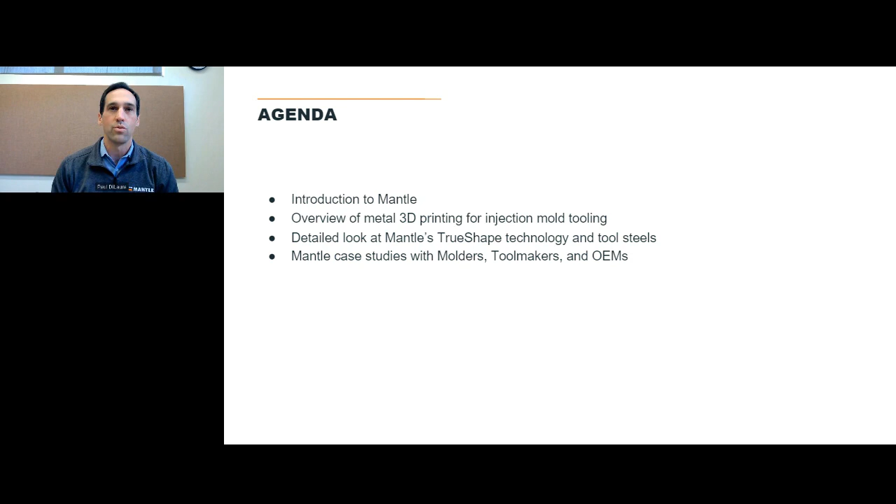So a bit about Mantle. Mantle is a technology development company. We've developed a metal 3D printer, we've developed software, and we've developed tool steel materials that we sell to molders and OEMs and tool makers to really automate the toolmaking process and reduce the time and cost associated with what is today a very lengthy and time-consuming process. And we're able to do that by producing tool steel components that meet the accuracy requirements, surface finish requirements, and material property requirements of many types of tooling. So we'll go into a lot more detail on that.

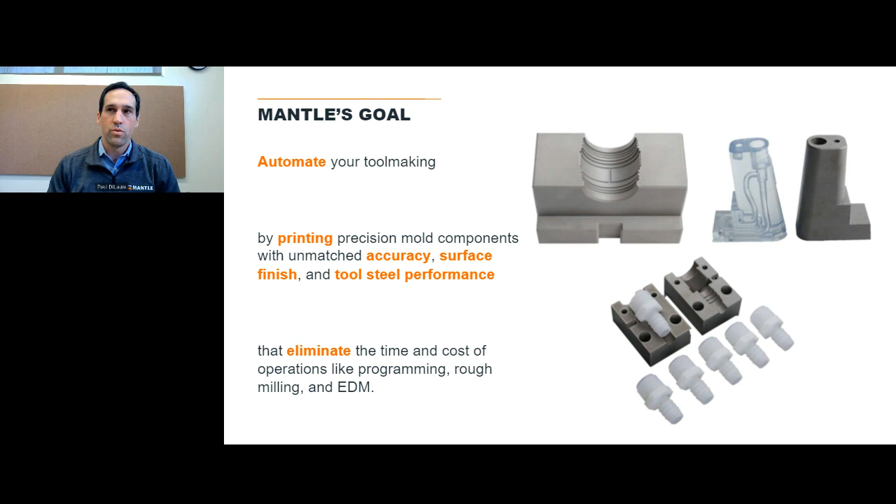But before we do that, let's talk a little bit about the landscape and how Mantle fits into the landscape of metal 3D printing, because we're not the first company that's developed a metal 3D printing technology. And we're not even the first company that's been used for tooling, including injection mold tooling, which is the primary application that our technology has been used for. But we are doing it in a different way, and we'll talk about that.

But first, let's talk a little bit about the challenges associated with tool making and why 3D printing can be relevant for it. I think, as probably most of you are aware, the process of making a tool, making an injection mold tool or extrusion die or a tool like that, is a very time-consuming process. It can take weeks to months. It's very expensive. It can take a lot of very skilled labor, which is hard to find, increasingly hard to find, and increasingly hard to develop. And then, as we've all experienced over the last several years, challenges associated with supply chains and tariffs have made it even more challenging to develop tooling overseas and then import it here, which is a common practice, but one that has been a bit more risky lately.

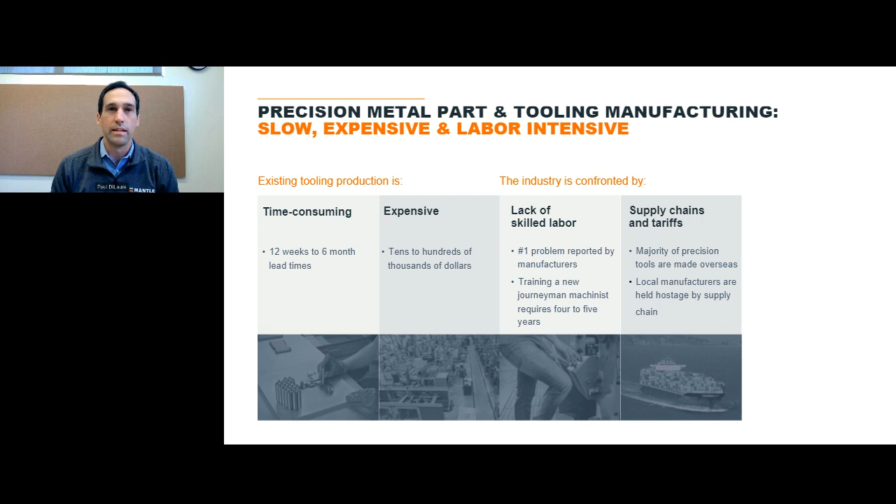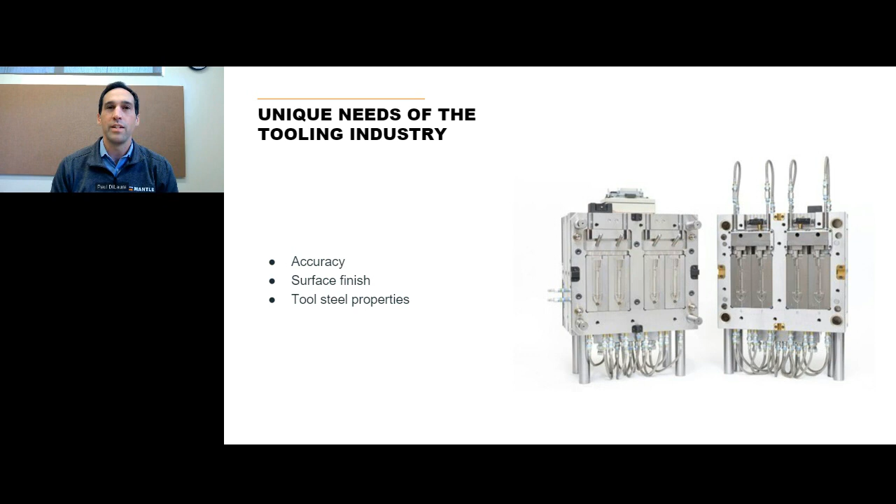The requirements to make an injection mold tool are really amazing. An injection mold tool is an amazing feat of engineering and manufacturing in terms of the accuracy, the surface finish, and the ability to produce millions of parts consistently over time. Really an amazing feat to create an injection mold tool.

But in order to do it, it takes a lot of steps and a lot of resources. Typically you're dealing with not only a quoting process, but sourcing raw materials, creating the rough part, and then a variety of steps in order to create the precision finish required for an injection mold tool. It's typically multiple machining operations, multiple EDM operations. Each of those operations requires machine time, programming, handoffs, and scheduling, and all of that contributes to the long lead time associated with tooling and the high costs associated with that.

So there's an opportunity, if there's an opportunity to automate this, if there's an opportunity to eliminate some of these steps, that can be of great value.

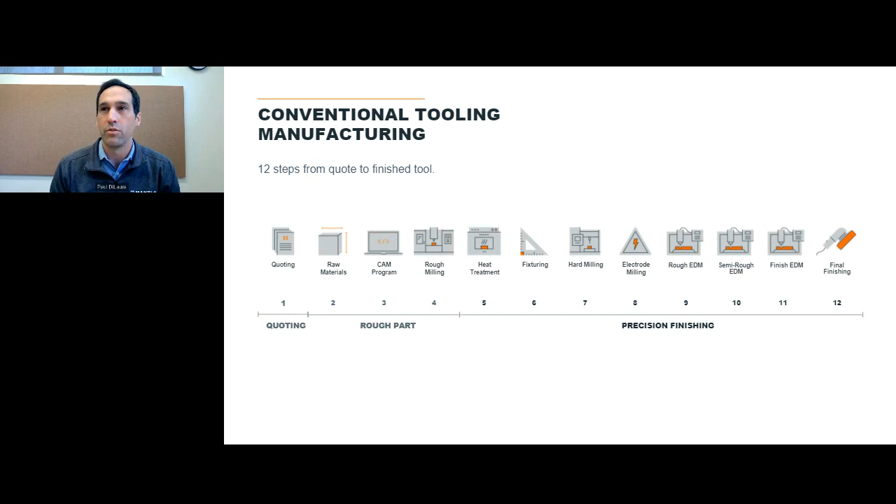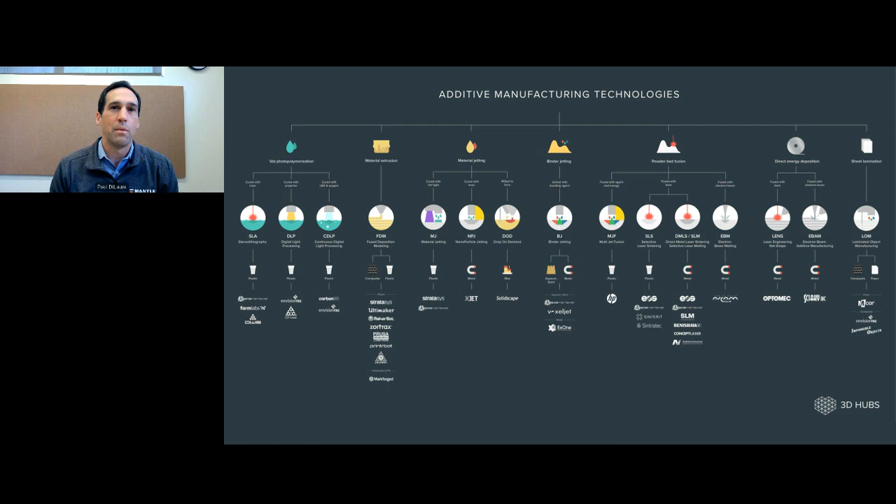Now, as I mentioned, Mantle is not the first metal 3D printing technology on the market. There's a whole host of technologies out there. This slide shows over 15 categories of printing technologies, hundreds of different companies in this market that have pursued this market. But I'm really going to focus on 4 of them that are relevant for tooling, or have been used in some cases for tooling.

The first of these is powder bed fusion, sometimes referred to as direct metal laser sintering. This is perhaps the most commonly used for injection mold tooling. It's essentially a bed of loose metal powders that a laser beam goes over and etches or welds together. Then the powder is reapplied, the bed lowers, and that continues on and on again until layers are built up and a 3-dimensional tool is formed.

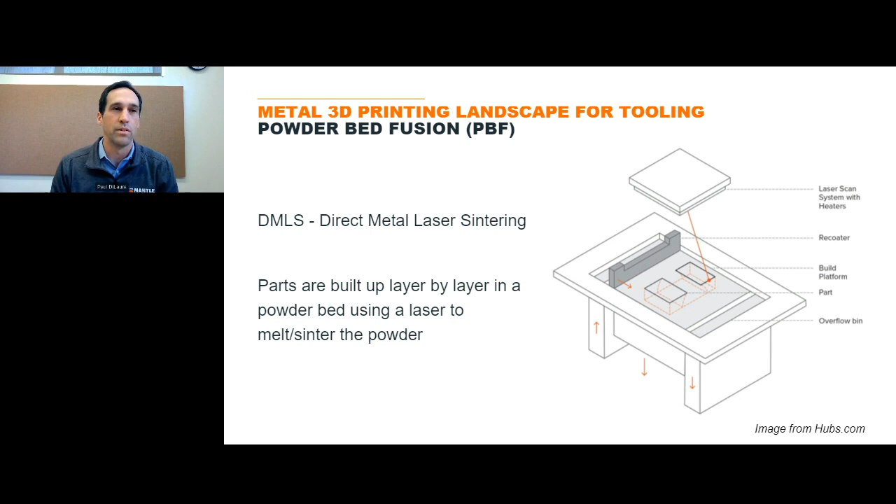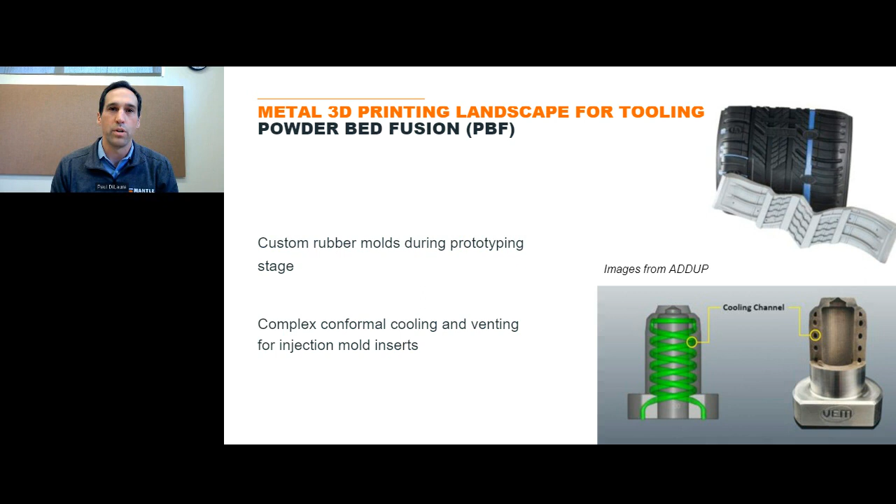It's a great technology, and it's been used very successfully for types of tooling like custom rubber molds during the prototyping phase, and also for injection mold tooling, specifically when things like conformal cooling are relevant, when there's a desire to create very unique geometries that can be 3D printed but can't be made conventionally very easily or at all. Similarly for things like venting and creating porous structures to improve venting in a molding process. So all those are great applications associated with this technology. There's also the opportunity to build on top of existing tools, to repair or build on top of them - a great advantage of this technology.

Unfortunately, some of the disadvantages are that the parts themselves that come out of the DMLS process are fairly rough and generally do not meet the precision standards of tooling. Therefore, a lot of post-processing is required to meet those requirements. Similarly, the parts have residual stress built into them because of the laser process, essentially a welding process. So secondary operations like machining or EDM cause the steel to warp, bend, or move, making those operations more challenging. Also, you're dealing with loose metal powders, and not every shop is set up to deal with that.

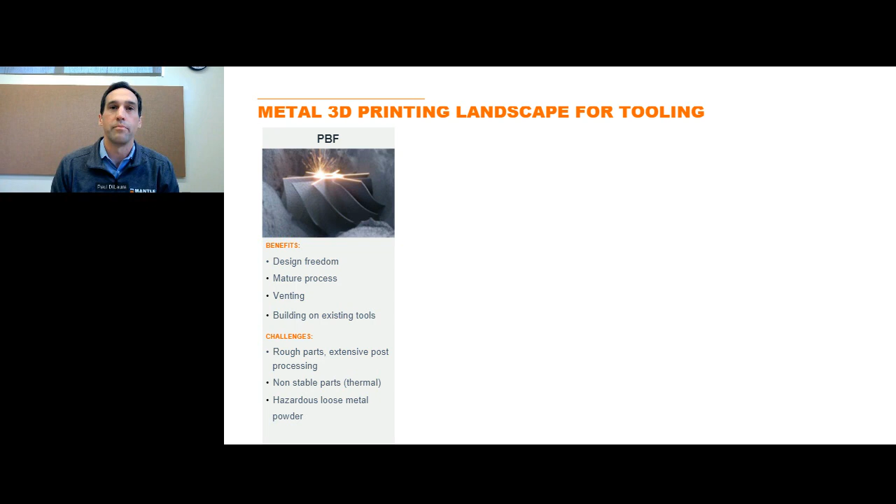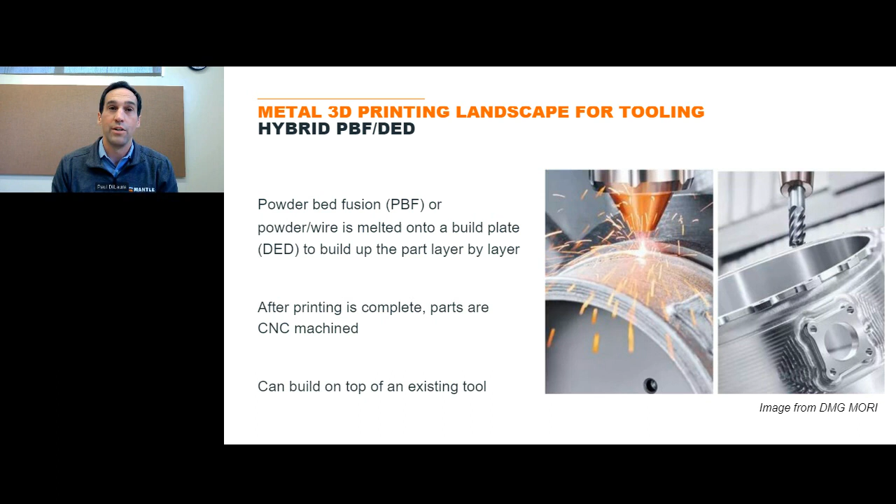Now, kind of an advancement on that technology is to turn it into a hybrid process that includes not just direct metal laser sintering, but also machining in order to clean up the surfaces and improve the surface finish and accuracy. That can be done on top of powder bed fusion or on top of another similar technology where you're extruding a bead of powder or wire that's melted onto a build plate. In this case, it's a hybrid process - you're machining, and you can build on top of an existing tool to get very good accuracy, while getting the design freedom that comes from 3D printing.

But again, the challenges are you have a part that has a lot of residual stress in it. The tool itself has a lot of residual stress, and it can be very challenging to do those secondary operations because of warping and bending. Also, these systems tend to be very, very expensive and really haven't been adopted very widely as a result of that.

A third category is a material extrusion process, often called MIM extrusion, where you have some form of media, a filament or a rod made of metal powder with a binder and a wax that encapsulates it. That is then 3D printed, extruded.

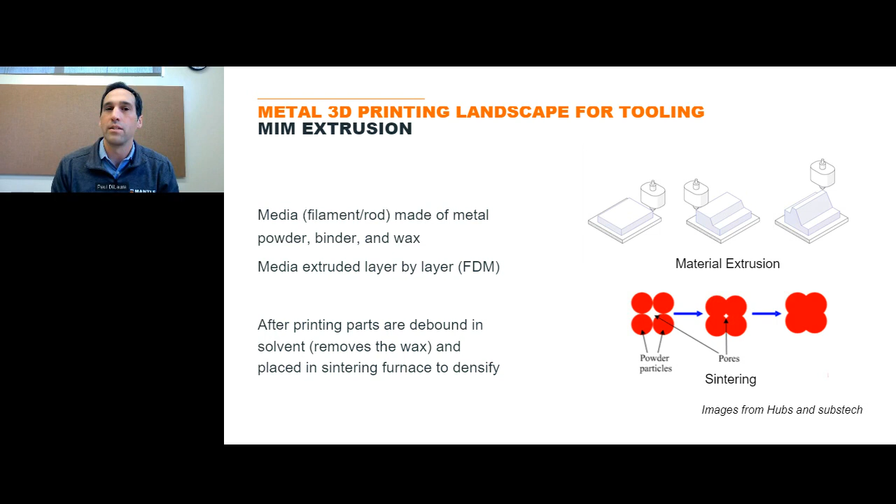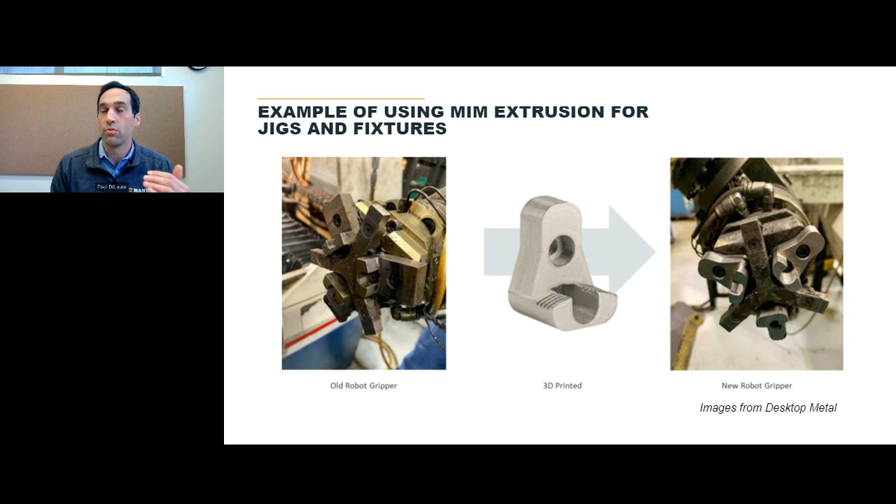Later there's a debinding step and a sintering step to turn that into metal. This has been used very successfully for things like jigs, fixtures, and different types of tooling that generally don't have the same precision or accuracy requirements as injection mold tooling. It's also generally a low-cost solution, low maintenance, easy to use. But the parts themselves are fairly rough and don't meet the surface finish or accuracy requirements of tooling, so a lot of post-processing is required.

Similarly, the parts themselves are not very dense, and you're not able to create thick cross sections. You get a lot of shrink, and you're not able to control the accuracy very well. And finally, there's binder jetting.

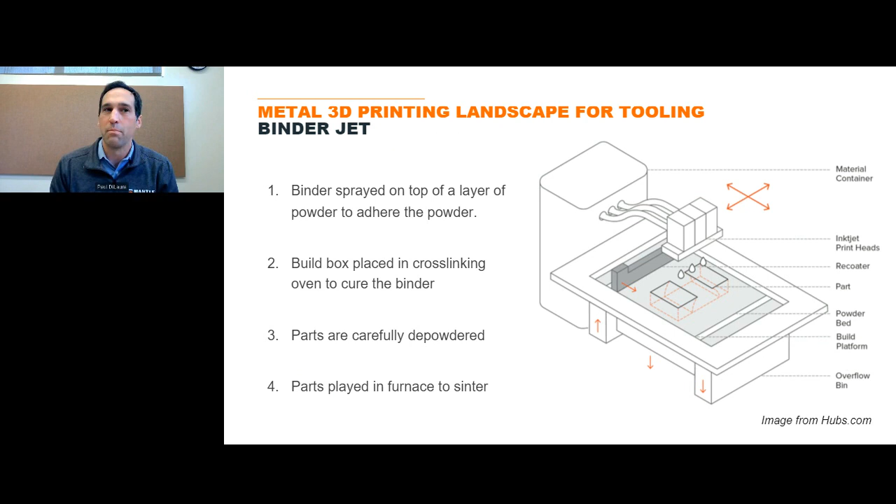Binder jetting is a process where you have a bed of metal powder, and a binder is applied on top of it. Then there's a curing step that cross-links that binder before it's depowdered, and the parts are placed into a sintering furnace.

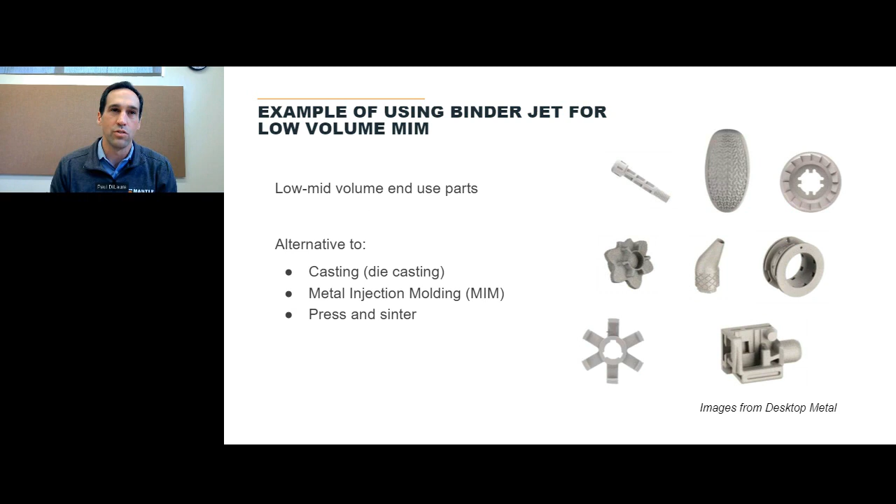It's used to create all sorts of great end-use components, including some images here. That's really more the target for this technology—end-use components—which it can make, in many cases, at relatively low cost and high volumes, because many parts can be made at once.

Again, you have the challenges associated with thick cross-sections, and also the challenges of a high shrink rate that make it very difficult to control the accuracy.

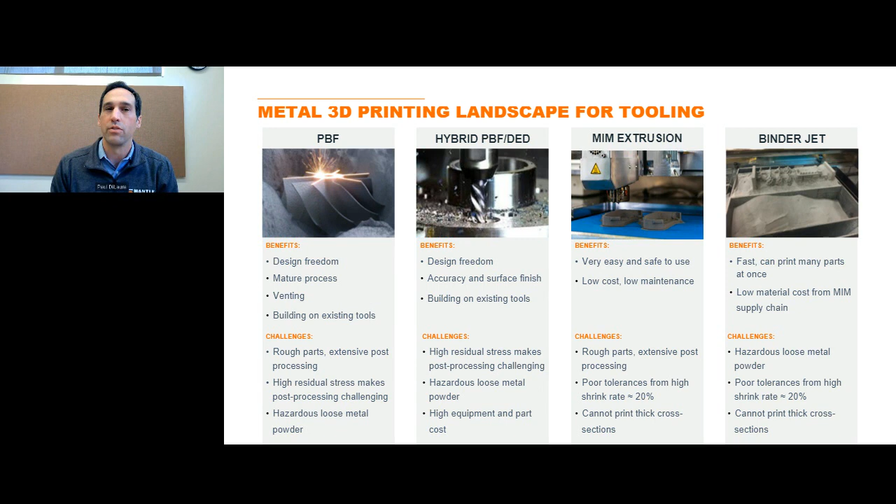So to summarize, for the most part these technologies are capable of producing a rough part, but there's still extensive post-processing or secondary operations required to meet the standards associated with tooling. So you still have a lot of these same EDM and other operations to meet requirements, which drives up time and cost. As a result, these technologies have generally not been widely adopted for tooling.

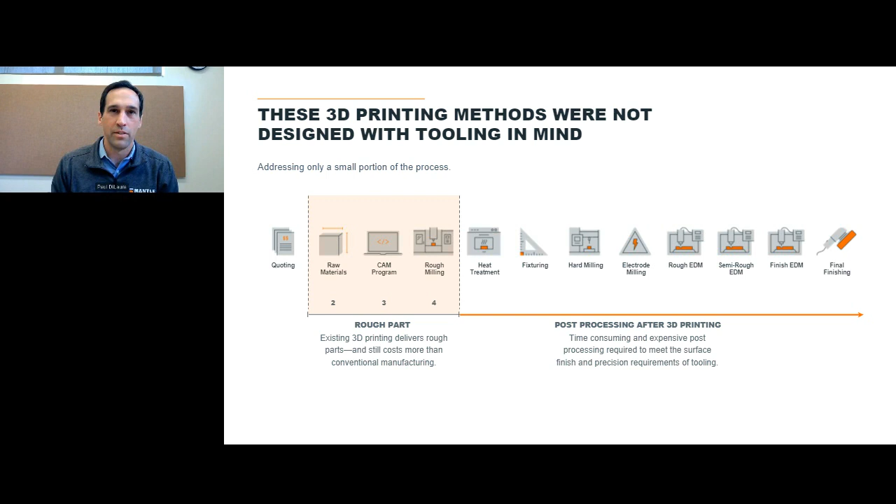Now let's shift our attention and talk a little more about Mantle. As I mentioned, we've developed our technology specifically for the needs of the toolmaking process. As a company, we've been doing this for 7 years, developing the technology that whole time. For the first 5 of those years, we worked fairly quietly.

We really didn't tell anybody what we were doing. We worked with a couple of toolmakers, molders, and OEMs to give us feedback and make sure we were meeting the requirements of the industry. And we understood those requirements to be what's shown on the screen here.

What we've developed is a technology that produces tooling components with surface finish comparable to what you get from, say, a sinker EDM process—1 to 3 micron RA. We hold tight tolerances and accuracies of generally plus or minus a thou per inch, and the ability to hold very sharp features and crisp edges, the types of features often used in injection mold tooling, extrusion dies, and other kinds of tooling.

Like other 3D printing, we're able to take advantage of the flexibility that comes from a 3D printing process and do things like conformal cooling designs for improved cycle times and optimized thermal management. We're able to build those geometries right into the part as it's being printed, and there's no extra cost associated with that.

We've developed tool steel materials that I'll talk more about, but we have an H13 tool steel and a P20 tool steel that we call P2X, and we're developing other tool steels like a 420 stainless. We've tried to develop this system so that it's very easy to use and can be dropped right into a tool room, right into a shop, without requiring a lot of training, expertise, and programming in order to operate our system.

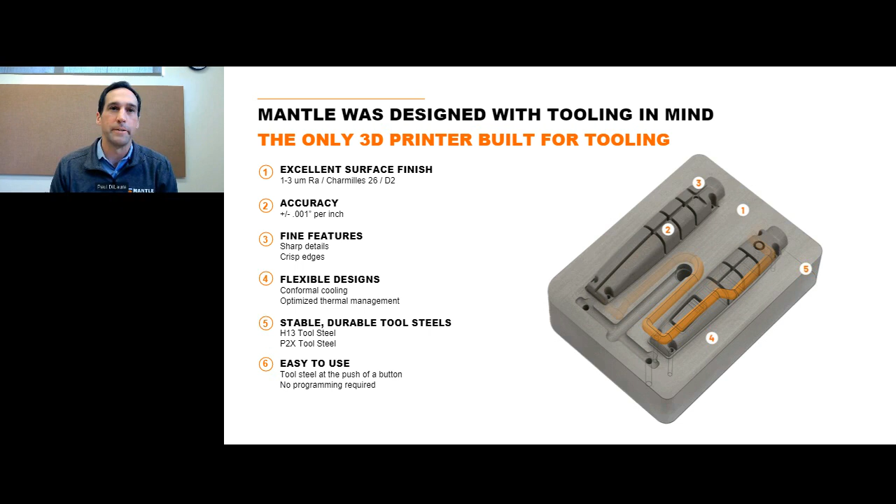So the technology of what we've developed really consists of 3 main things: there's tool steel materials, there's software - it's very much a software-driven, software-controlled process - and then machines, equipment. The machinery includes two different pieces of equipment, including a printer and a sintering furnace. The printer is shown on the left image, the sintering furnace is on the right.

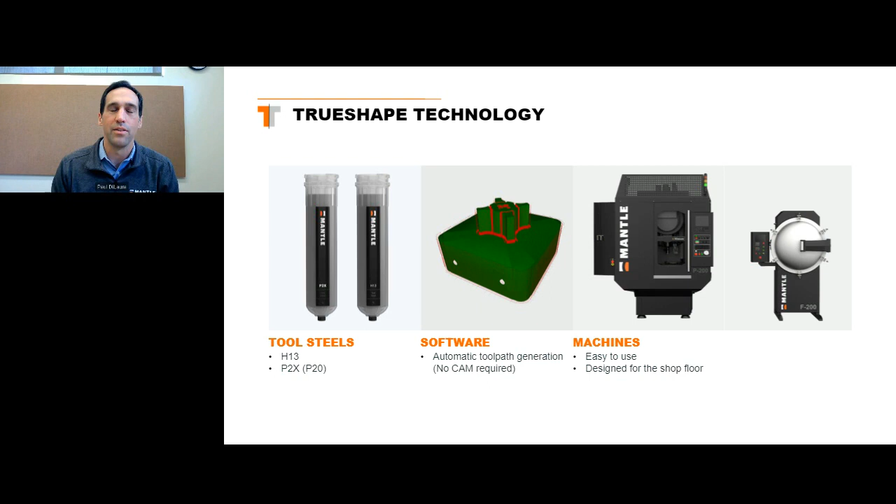So the tool steels, how do they work? Well, what's unique about Mantle's process, one of the unique aspects of our technology, is that our tool steels start their lives as pastes, metal pastes. You can think of it like a toothpaste or a thick paint in terms of its consistency. Essentially it's a combination of metal powders, metal particles, a little bit of binder or glue to hold everything together, and some solvents that allow the material to flow together. This slurry is what we print.

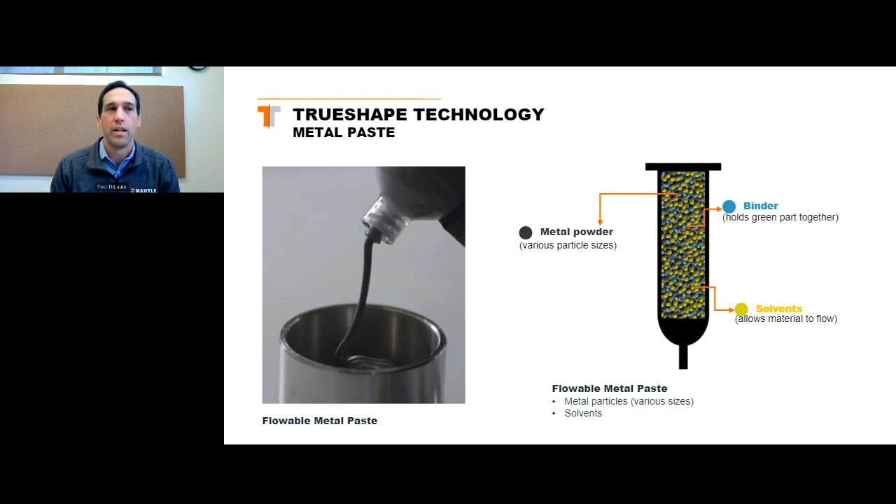So we print this paste, we deposit the paste, and we extrude it in a manner that's similar to many other types of 3D printing, where you extrude a material and build something up layer by layer. We extrude this paste, and then as we print, after each layer, we heat and dry the paste, and that removes the liquid. So you're left with the metal powders, the metal particles, and a little bit of glue or binder that holds everything together. At this point, it has the consistency of, let's say, a dense foam or a crayon - it's no longer in the liquid state, it's stable enough to hold the shape of what's been printed.

It's also in this state that we introduce the next operation, which is a machining operation or a shape refinement operation. So our process is also a hybrid process, meaning we incorporate both 3D printing and machining in order to clean up the artifacts of the printing process. By machining, we're able to clean up the edges, remove any artifacts of the layer building that takes place from the extrusion process, and produce a component that meets the accuracy and surface finish requirements of many forms of tooling.

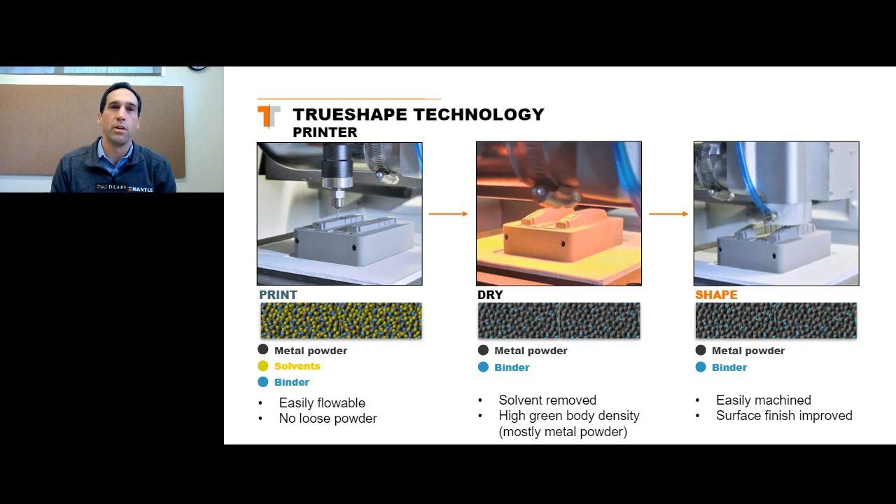In this process, we'll repeat, meaning we deposit the paste, we heat and dry it, we machine, and we do that iteratively as we build up a tooling component before finally taking that tooling component that's been built and transferring it from our printer into a sintering furnace. Inside the sintering furnace, we elevate the temperature to just below the melting point of the steel, so it's a little less than 1400 degrees Celsius.

In that process, the metal particles all fuse together, and that trace amount of binder or glue is removed. As the part cools off, as the tool cools off, it turns into dense steel and takes on the properties of, for example, H13. So our H13 steel is chemically equivalent to any other H13 steel. The only difference is it starts its life as a paste, which allows us to print it and shape refine it when it's in a very soft state, and then when it turns into steel, it's durable tool steel, just like any other H13 steel.

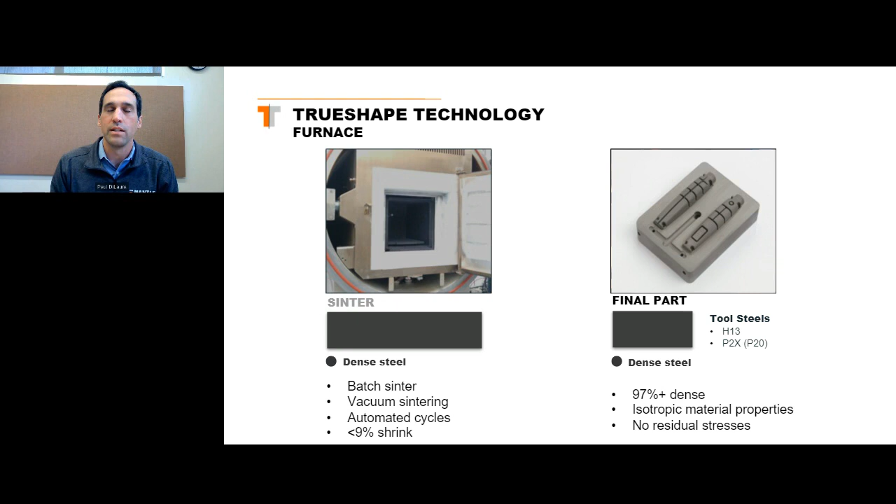Now, as I mentioned, it's very much a software-driven, software-controlled process. No programming is required. The software that the user interacts with creates all of the tool paths for printing and for machining. So the operator doesn't need the skill associated with CAM programming or machining. Instead, they can just upload the model, and like many other types of 3D printers, we generate all of the instructions, all the G code that's then sent to the printer and run.

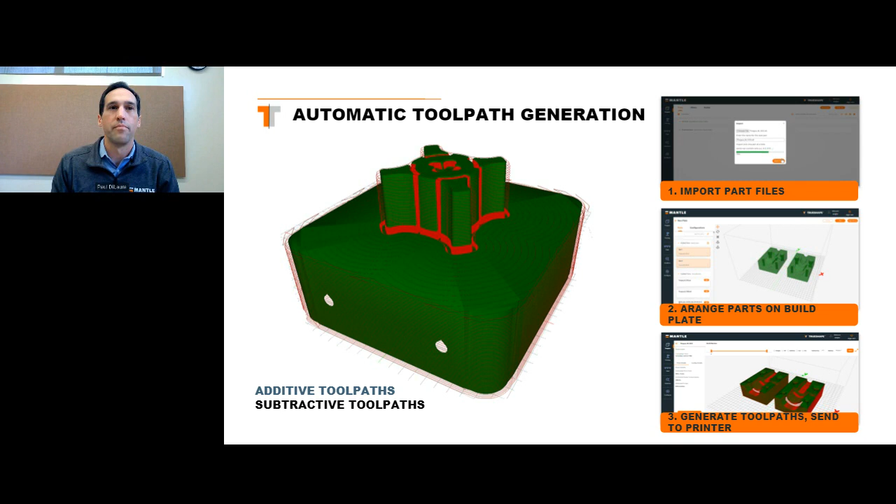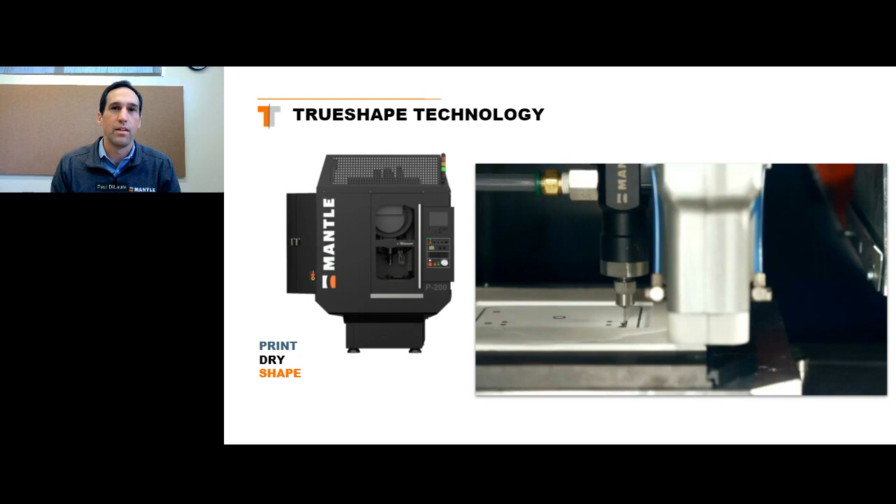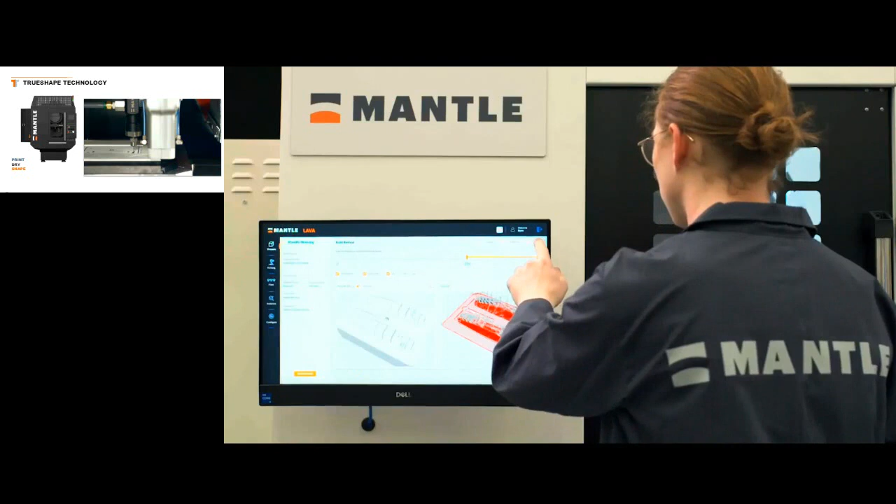Here comes a brief video that's going to show this process on one of our printers. It starts in the software, and what you're seeing here is an operator calling up a build that had been uploaded into the system based on the CAD file. So it starts with your CAD file, your tool design, just like any other tool design. As I mentioned, we generate all the G code, all the tool paths, and send that to the printer.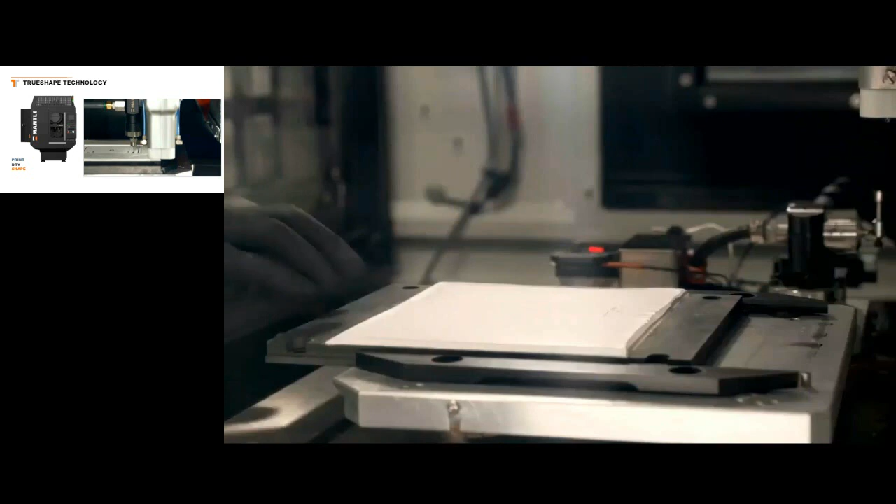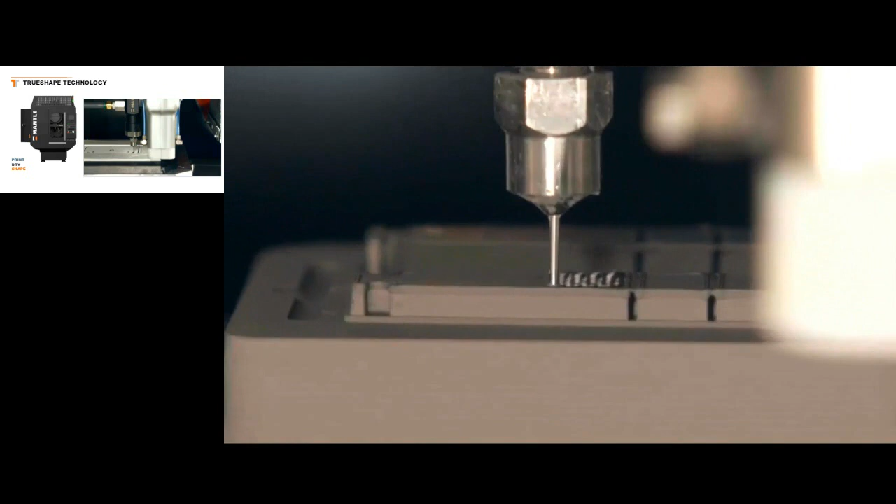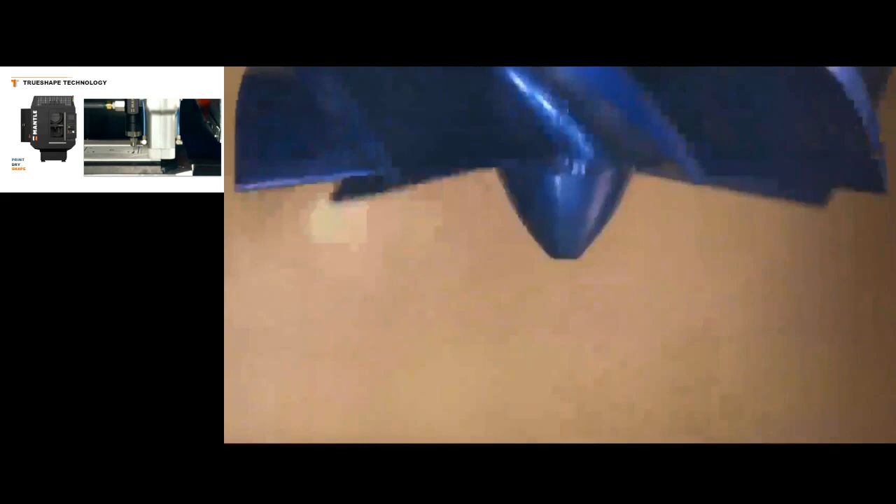The operator then loads up the paste, which comes in those 1 liter tubes, loads up what you're seeing here, a build plate, and then the printing process starts. So we extrude the material, we're printing here, and we build up layer by layer. But after each layer, we heat and we dry, and that removes the liquid, converting what was a paste into something that's like a foam that can be machined very easily.

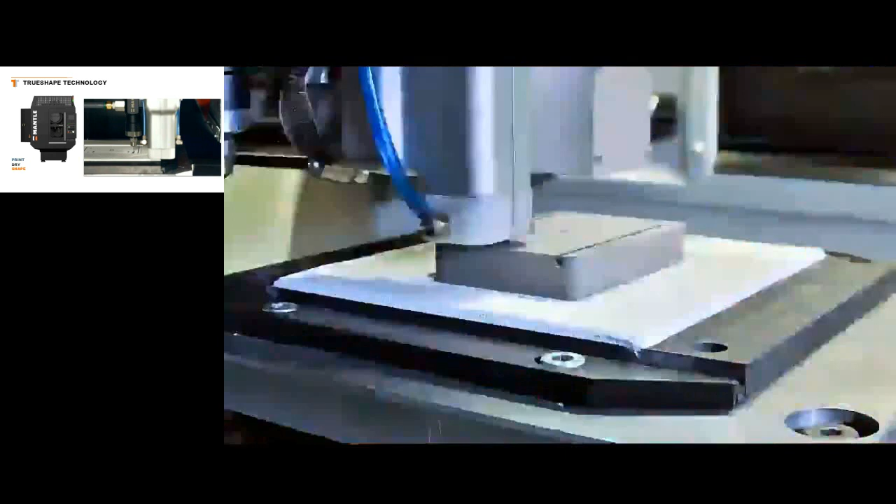The machining generally takes place in a couple operations. One is after every layer, we'll do a very quick facing operation to remove a small amount of material and make it perfectly flat before the next layer. Then every 10 layers, we do this shape refinement that you're seeing here, where we clean up the edges. We're not cutting the features - those have been printed - but we're just cleaning them up in order to improve the accuracy and surface finish. It's iterative, meaning the process just repeats itself: the heating and printing, the heating and machining, that process repeats before we then transfer into the furnace.

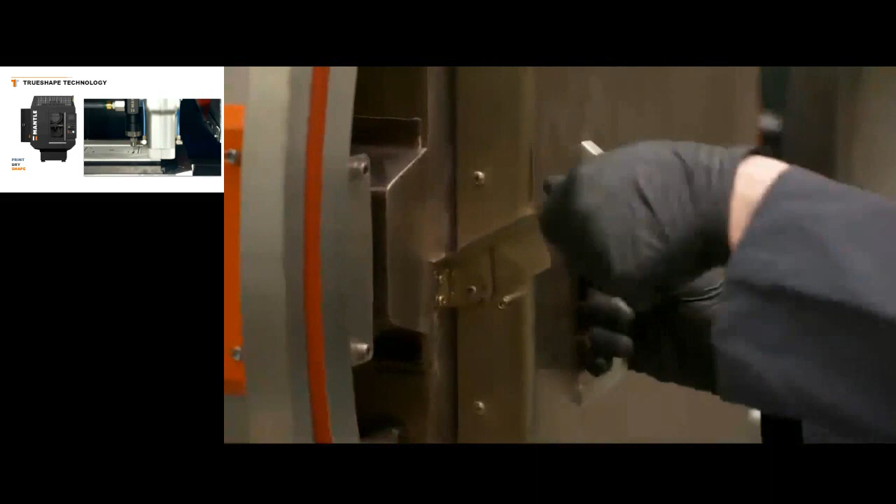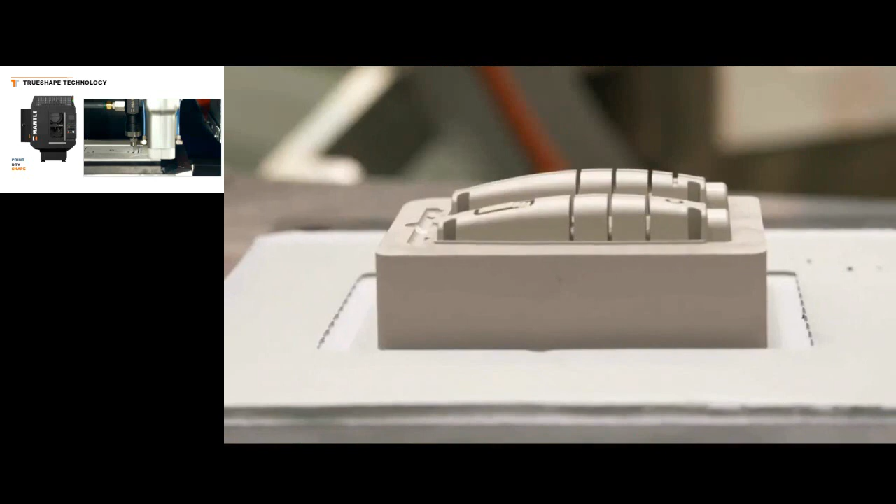The sintering furnace run will last anywhere between 30 to 42 hours, depending on the size of what's being sintered. And then when it comes out, it has the tool steel properties of what we discussed with respect to our H13 and our P20. You're seeing right here the finished quality or output right out of the furnace.

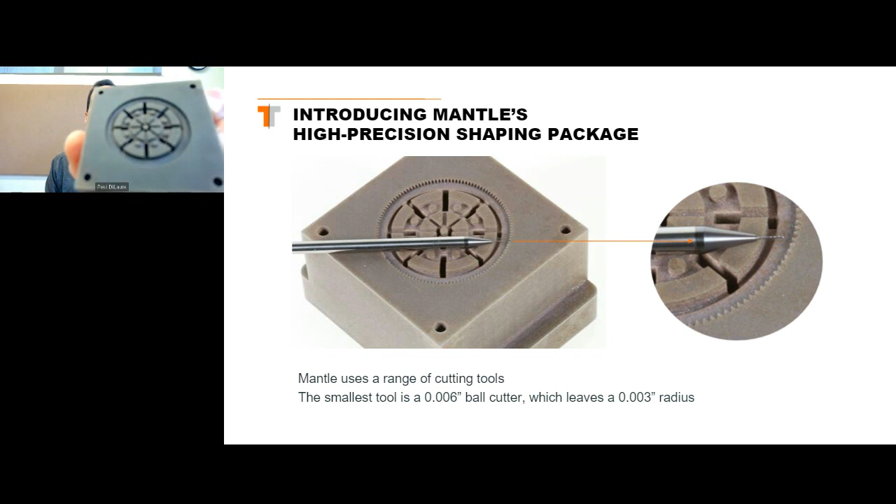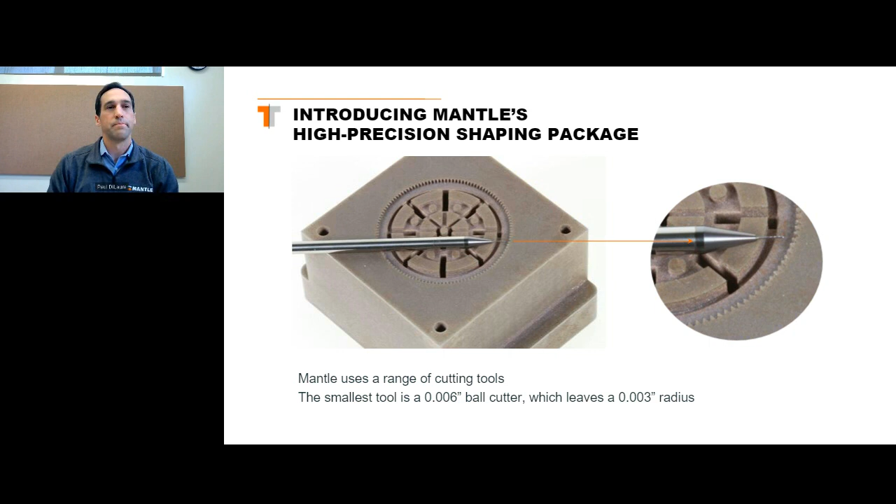So I mentioned that we sit on top of a CNC machine and we take advantage of the tool changing capabilities of the CNC machine. We have a range of cutters that we use. The smallest cutter that we use is a 6-thou ball cutter. I'm going to show a picture here - you're seeing the picture on the screen, but I'm also holding up to the camera the same component. So the 6-thou ball cutter leaves a 3-thou radius. Again, that's very much like an EDM process, but all of that is achieved without any programming in a very hands-off way. We use a range of tools - that's the smallest one, but we cut different aspects depending on what's required with different types of tools.

So the tool steels - what really matters here is that the tool steels have the properties able to withstand the rigors of an injection molding process or an extrusion process. We've developed two steels already. The first was a P20 steel, which has a hardness of about 32 to 34 Rockwell. Then we also have developed an H13 tool steel, which has a Rockwell of 42 on the C scale and can be heat treated up to the low 50s as a secondary operation.

Really, H13, I would say, is the workhorse right now - that's what most folks are using. And we have a new material in development and testing right now with partners, which is a 420 stainless steel that we're going to continue to develop this year and release later. So that will continue to expand the breadth of the steels that Mantle will offer.

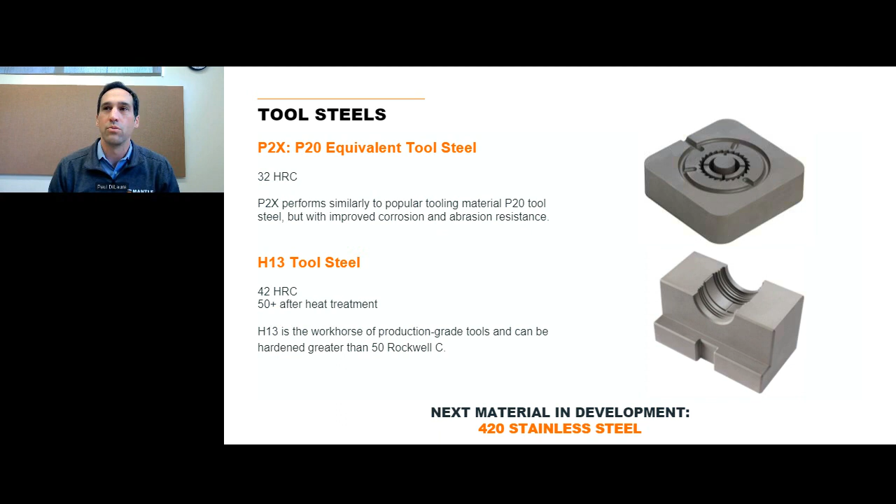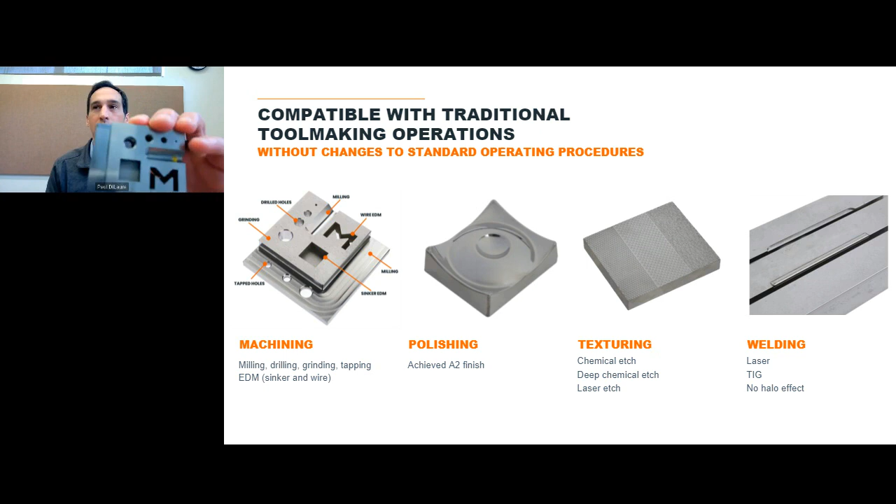One of the key things we've tried to emphasize with our tool steel development is that our tool steels behave just like any other tool steel in terms of secondary operations you may want or need to perform on them - whether that's machining, drilling, grinding, tapping, or EDM. What you see pictured here on the left started as a printed block, and then all these operations were performed on it. What's important is that those operations didn't need to be changed in order to perform them on Mantle steel.

The same operations, same types of settings, allowed for the results, and the steel itself is stable and remains flat. After all the material was removed from this big block, it held within 7/10 flat. Similarly, texturing and polishing can be done on our steel - it's been polished up to an A2 level.

Operations like welding can also be performed, and we've demonstrated with partners that they can be done, with no difference in how they're performed and no halo effect or any remnants associated with the welding process. So the goal is to fit right into the tool-making processes that companies have today, but do so in a way that's simpler, unattended, and reduces the time and cost associated with making these tools.

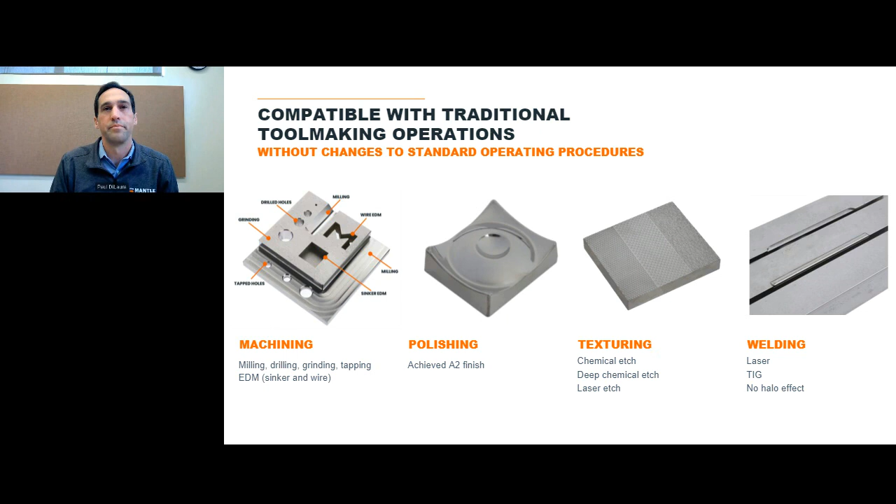So that's a bit of overview of the technology itself. Next, I'm going to talk about how some of our customers - molders, tool makers, and OEMs - are taking advantage of the technology, incorporating it into their processes. I'm going to start with Nicolet Plastics.

Nicolet Plastics is an injection molder out of Wisconsin with multiple operations. They have their own tool making team and do tool making internally, as well as working with suppliers who provide tools to them. Part of their strategy is they wanted to offer more complex tools to their customers in a shorter period, and ultimately deliver plastic parts faster, so they can accelerate the launches of their customers and get engaged earlier in the development process.

One of their customers is Gamber Johnson. Gamber Johnson makes a variety of components used to connect things like tablets, computers, and phones to emergency vehicles. There's a wide range of vehicles and tablets that need different types, sizes, and shapes of these attachment devices, and it's changing all the time - it's a high mix type of environment.

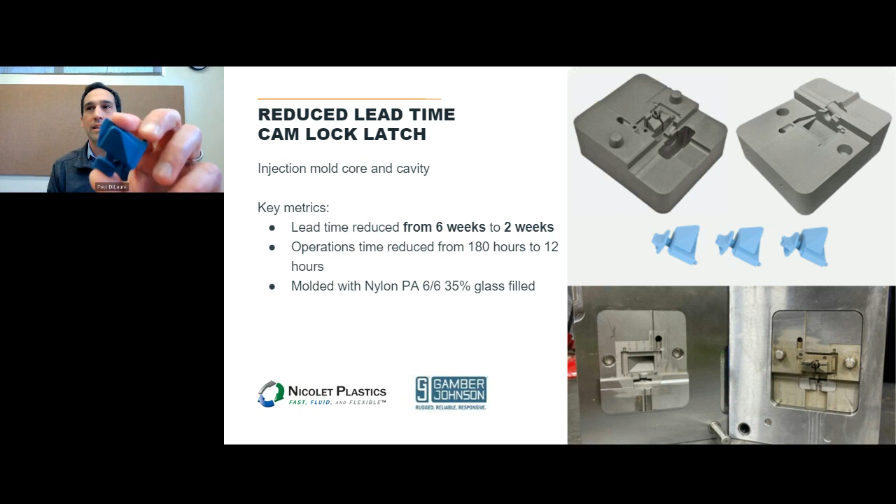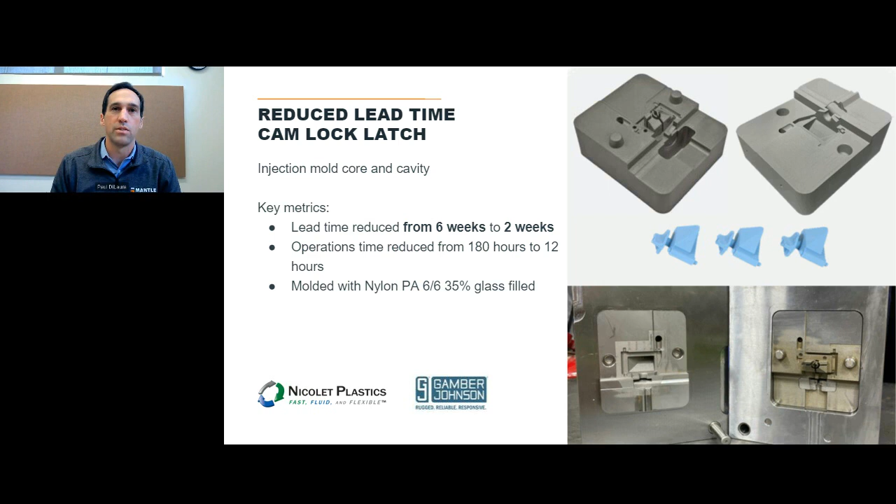The component needed in this case is a latch, which needs to be molded out of a challenging plastic - a 35% glass filled plastic. It has a lot of very complex features that would typically have required a lot of EDM and different types of operations in order to produce the tool needed to mold this, making it a time consuming and expensive process to make the tools generally.

Nicolet said it would typically be about 180 hours of toolmaker time to create the 3 tooling components needed to mold this one latch part, and it would have taken about 6 weeks to go from part design and tool design to the tooling process, and ultimately to the molded part they could ship to their customers.

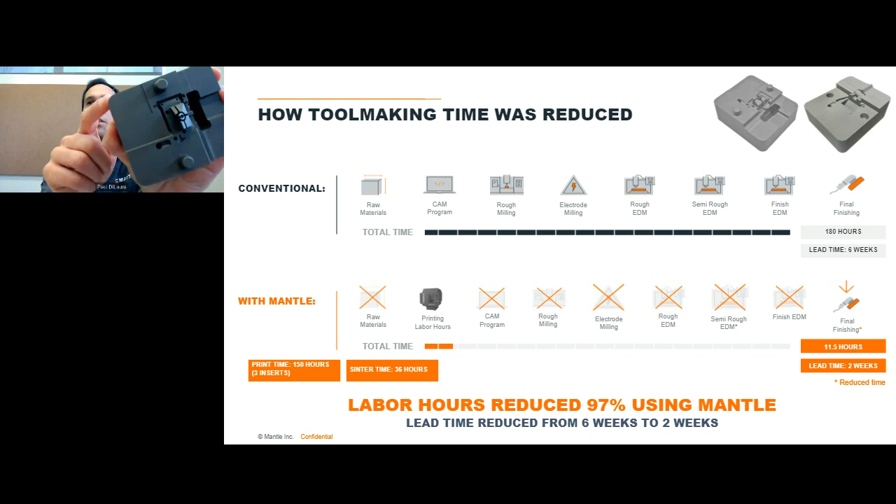In this example, Mantle printed these 3 tooling components, and then Nicolet Plastics finished them, requiring about 10 hours of finishing to do things like clean up around the perimeter - I'm holding up one of the components here. We printed starter holes for the ejector pins, and they wired those out to meet the accuracy requirement of the tenths needed for ejector pin holes. That type of work took about 10 hours.

It took about an hour, hour and a half of time on the printer itself, and transferring between the printer and the furnace and working in software. So all told, it took about 11 and a half hours of toolmaker time. The printing itself took 150 hours, which happens completely unattended - it can run over a weekend and that type of thing.

But the total toolmaker time went from 180 hours down to 11.5 hours, and the time to launch and mold the plastic part went from 6 weeks down to 2 weeks. So you're able to get the molded part in the hands of their customers more quickly. That was the value for them, doing so in a way that was unattended and didn't tax their tool makers as much. They have, like most folks, a relatively small tool making team that's incredibly busy and taxed. So the ability to increase throughput through the tool room was of great value to them.

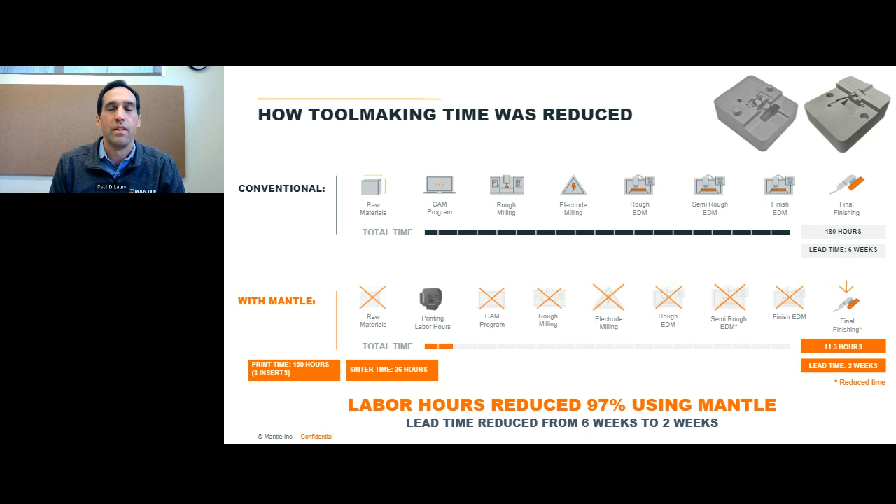Another example is with Fathom and their Summit Tooling Group in McHenry, Illinois. In this case, similarly, Fathom needed to mold a very challenging material - an overmold of a 60% glass-filled nylon, needing a steel tool for it. In this particular case, though, the tooling requirements were actually a little bit beyond what Mantle could print.

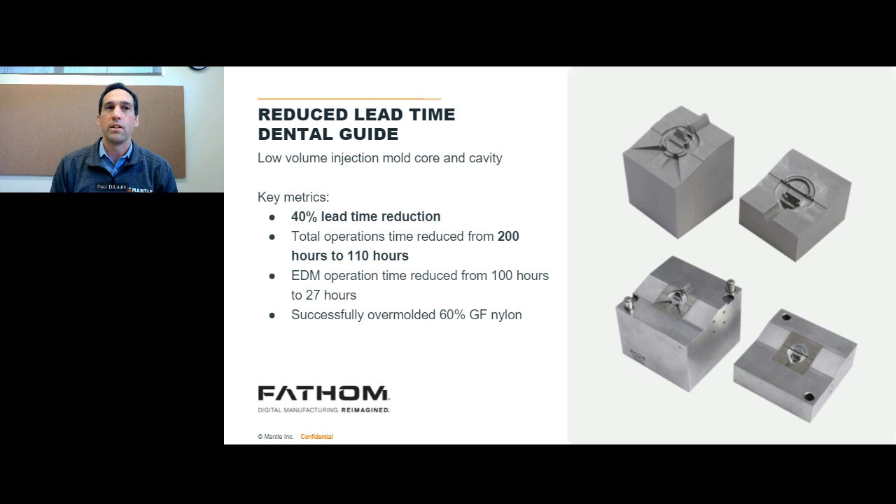I'm showing a close-up view here. There are some features here that were thinner than what Mantle can print. Typically we can print about 1 millimeter wall thickness, but you can see some of these ribs are less than that, and some features that are even thinner. So what was important to them is that they could still do the EDM operations on the Mantle printed component and do the polishing operations, with all that being seamless.

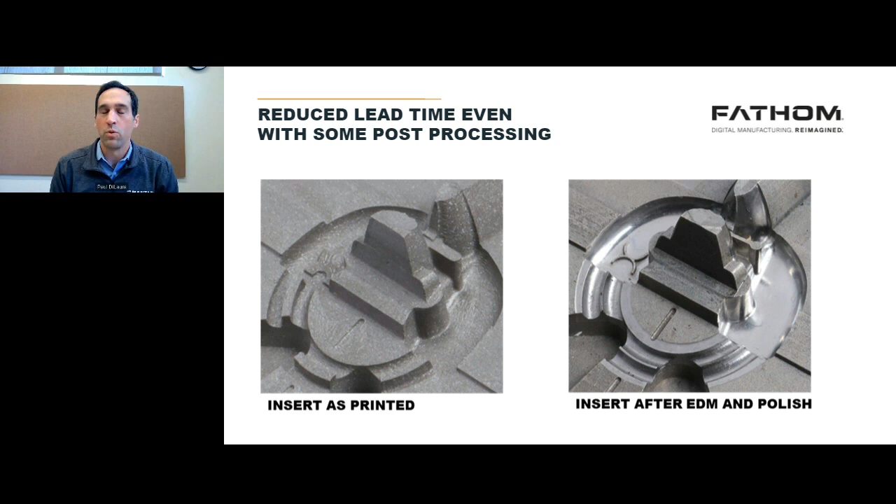They were able to do that, where when Mantle printed the tooling components, Fathom did the final finishing work. They still had to do EDM, but it took what would have been 100 hours of EDM down to 27 hours, and total toolmaker time from 200 hours down to 110 hours. So they were able to really reduce the time from their toolmakers and get that plastic part in the hands of their customers more quickly.

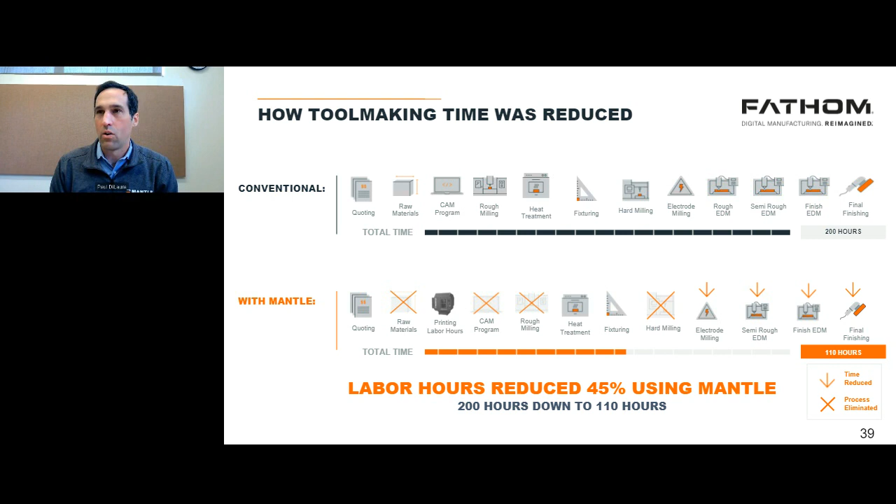Now, a key question a lot of folks have is the durability of our steel. Mantle's tool steel, as I mentioned earlier, our H13 is chemically equivalent to any other H13 out there - it just starts as a paste. That's the only thing different about it. But Tessy Plastics, a large molder out of upstate New York, wanted to evaluate the durability of our steel.

So they have an existing tool - it's a 32 cavity tool that makes these plastic components, the thumb wheel screw for a deodorant package. They produce millions of these every year out of this 32 cavity tool. What they did is replace 2 of those inserts with Mantle printed inserts. I'm holding up one of them here as an example. These inserts - we printed one in our H13 steel, one in our P2X steel.

Tessy did a minor amount of finishing, didn't touch any of the part detail, just did a little finishing around the sides in order to drop it into their mold base. Then put it in the mold base. This is over 1.5 years ago, and it's been running ever since. So this is now over 1.65 million cycles and counting, with no signs of wear on the printed tool.

Now it's molding a polypropylene type material, so not as challenging from a plastic perspective as some other examples, but there are S7 slides that cut across the top here. After all these cycles, no sign of wear or galling. This continues in production, and these parts are production parts making it out to their customers. So it's a testament to the durability of Mantle's tool steels.

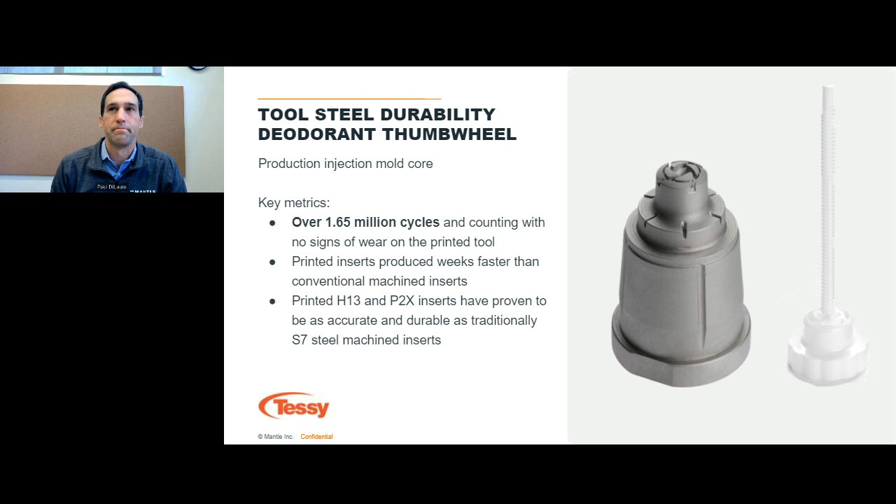Another example of a customer is Westec Plastics. They're a molder here in Livermore, California, that has in-house tool making capabilities. But for the most part, their tool making capabilities are centered around tool maintenance and tool repair. They would like to be able to offer more tool making to their customers, and again compress the time it takes to get a molded part in the hands of their customers.

The situation they had is they were in the process of building a very large multi-cavity tool for a medical device customer, but there was a design change. And the customer wanted to validate that design change before proceeding ahead with this large multi-cavity tool.

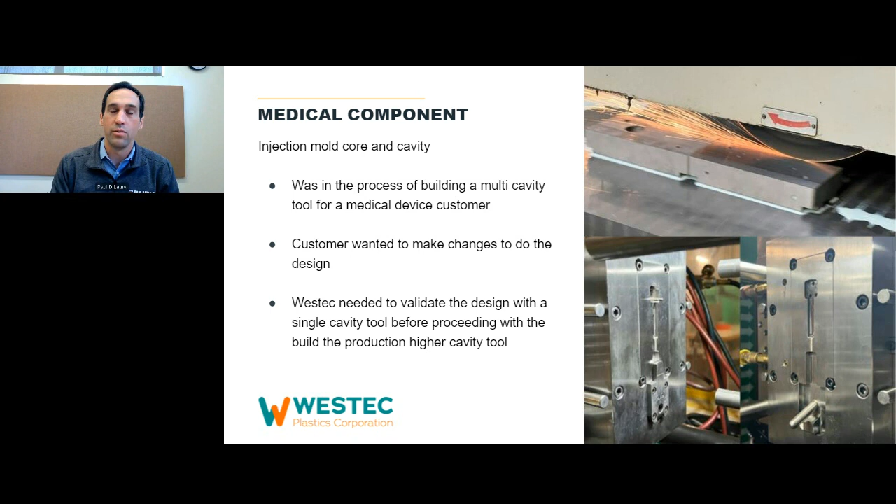So very quickly, Westec was able to design the tool and print it using Mantle Technology, perform a minor amount of finishing work as they dropped it into a mold frame, and then molded TPE samples that they were able to share with the customer, validate the design, and then proceed with the larger program. There was a 50% cost savings here, and it took active operations time, toolmaker time, down from what would have been 40 hours to 10 hours. And this again is using our H13 tool steel.

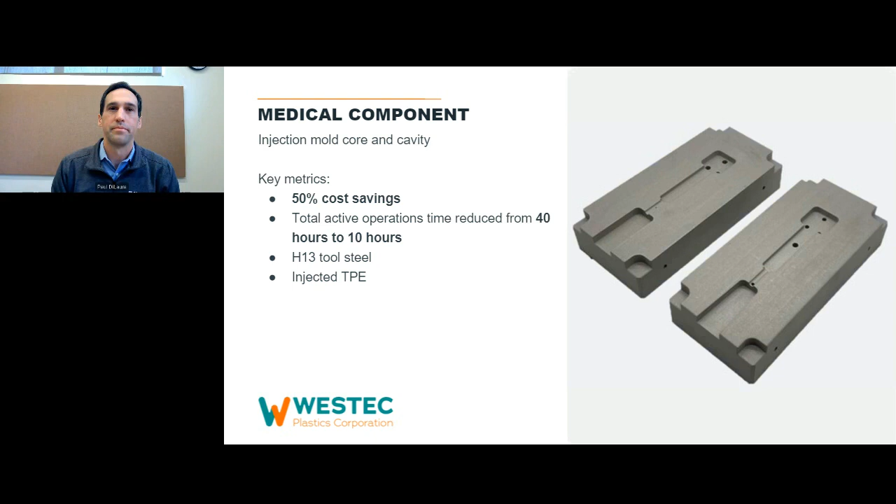Another example is Westminster Tool, a tool maker out of Connecticut that is a Mantle customer and had one of our beta systems last year. Their customer is Pepsi, and Pepsi wanted to test out in a tool steel a new design for the bottom of a plastic bottle.

Pepsi wants to iterate on all sorts of designs and optimize the blow molding processes for making these plastic bottles. They wanted to use conformal cooling to optimize the thermal properties and improve the molded part quality during their prototyping and product development phase.

They wanted to quickly test out different sizes and iterations of the bottom sections. So they used a conformal cooling design to remove heat during the molding process and to lengthen the life of the tool.

This was an example of a very quick project where Westminster worked with Pepsi on the design and went from design to completing the print and doing minor finishing work, including grinding the top and bottom, then getting into the blow molding setup that Pepsi has, all within 9 days. So they were able to get molded parts out much more quickly than otherwise, while taking advantage of unique geometries.

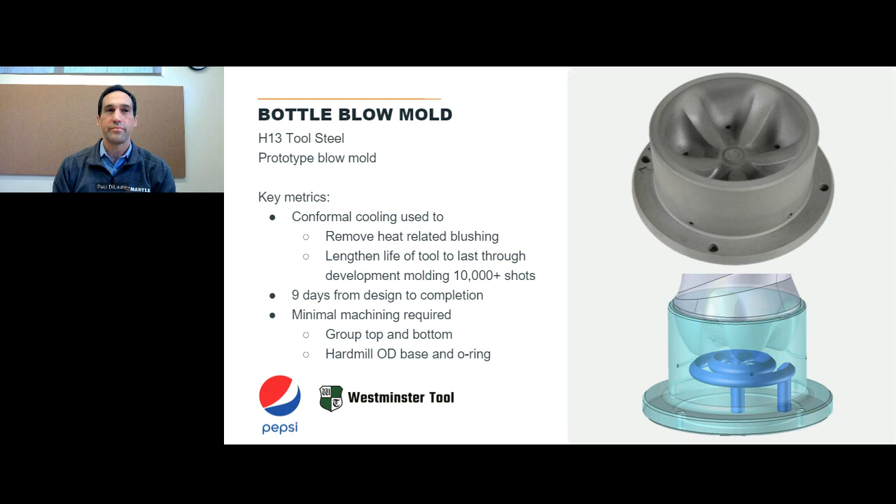By doing tool making and molding more efficiently, using production representative plastics and production representative tools. Using a steel tool is really important during a medical device validation process, so the ability to quickly produce a steel tool, steel tool components, and mold parts quickly is of great importance during product development and ultimately to launch products.

They had good benchmark data on this: it took the total time to create the entire tool, including the mold base, and begin molding parts, from what would have been 12 weeks down to 4 weeks, and reduced the cost of tooling from a little over $60,000 to a little over $20,000.

These tools were all accurate within 1 thou as printed, without any additional finishing. That's typical—generally we hold plus or minus 1 thou per inch.

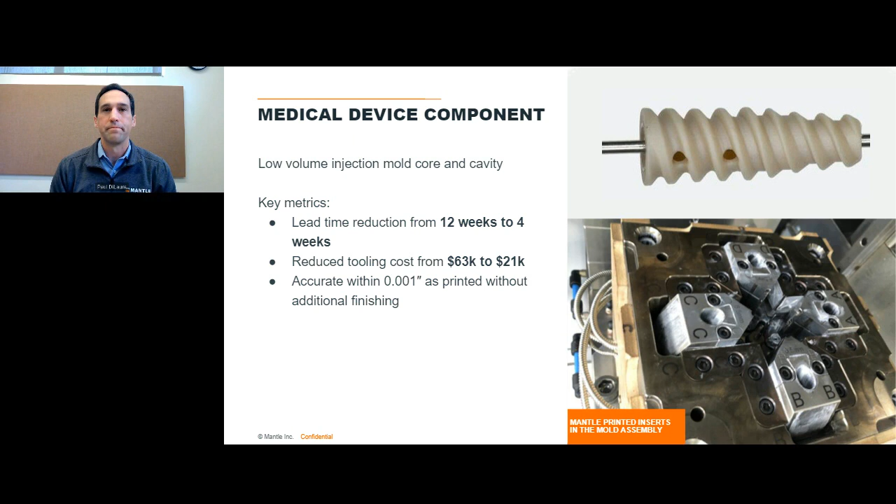So those are some examples of what our customers—OEMs, molders, tool makers—are doing with our technology, and a little bit more about how our technology fits into the landscape of other metal printing technologies and other technologies used to make tooling. That's what we prepared.

I see there are a lot of questions, so we'll start answering these here and go from there. Thanks, Paul.